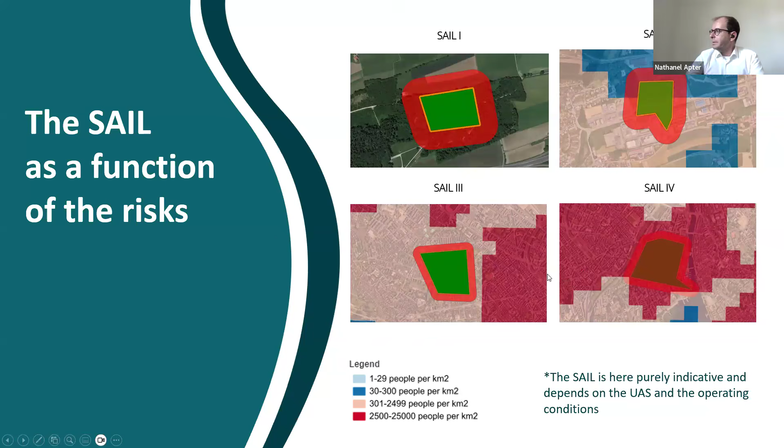Yeah, exactly. Then we have another definition which is important to understand for the next steps. It's the concept of robustness level. Maybe some of you might have heard that before. This term is very often a bit complex to understand. It's often described by two values, what we call the level of integrity and the level of assurance. The level of integrity is how good an objective is at reducing the risk.

And the level of assurance is the degree of certainty that we will have to show that this risk reduction is actually happening. So typically, the level of assurance can be a declaration, but it can also be a design verification. It depends a little bit how high the SAIL will be and how high the risk will be in general. Usually, this robustness level is either low, medium, or high. And we will see that this level is thoroughly documented in certain annexes of the SORA.

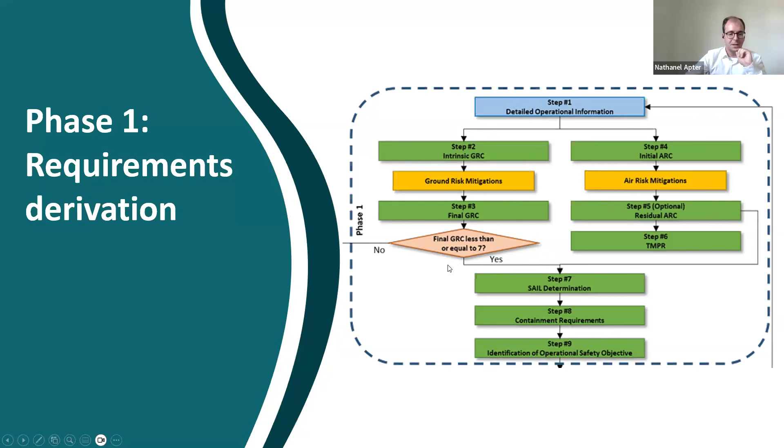The next step would be to look at a concrete use case because it's all very abstract, and I hope I didn't lose everyone already on those concepts. I think the best is to really look at a concrete use case to understand how this applies in practice. Before that, it's important to say that SORA 2.5 is not yet applied in the European Union, and therefore the example we will study was similarly authorized on SORA 2.0, but not yet on SORA 2.5. It's a fictional operation, but very similar to an operation which has been authorized in Switzerland.

We note also that the SORA process, and that may seem a little overwhelming for some of you, is a longer process to show the airworthiness of an operation. But it's not because we look at this specific use case that it's only valid for a specific place. In general, a SORA can be valid for a set of missions for an entire country, for the entire United Kingdom, or for the entire Switzerland. It is by no means specific to a location. We will study a location today in order to have something more visual, but the idea is not to have something specific to a location.

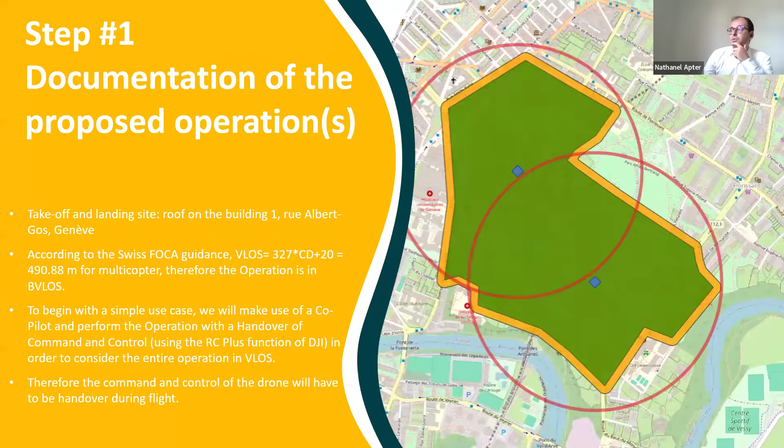Handover is usually a trick that we can use to extend the visual line of sight distance without going into a beyond visual line of sight use case. So that's about the visual line of sight distance. Then something that we also need to do in the first step is to study the area a little bit more, and especially the safety distances. Those safety distances are important for our ground risk class evaluation.

So in general, here again, I don't know the level of knowledge in the audience, but we usually introduce safety margins around the area where we intend to fly. The area where we intend to fly, which we see in green, is commonly called the flight geography. Around this flight geography, we define what we call a contingency volume, which we see here in yellow.

This contingency volume is here for all abnormal cases, meaning problems with command and control, problems with navigation accuracy, problems that could occur during normal operation. Here again, the Swiss FOCA provides guidance on how to calculate it based on different things, among others the accuracy of the navigation, the position hold error, the reaction time of the pilot, and the distance for the contingency maneuver. In our case, it would be about 30 meters. So it's important to calculate this distance, which we see here, like I said, in yellow or orange.

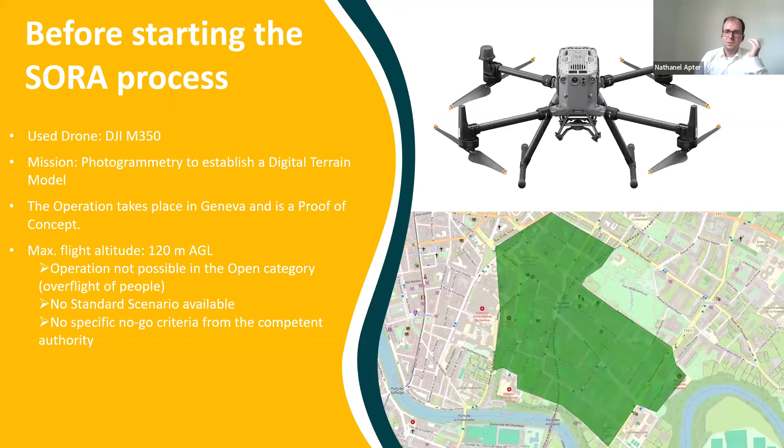Then we have as well the ground risk buffer. This is this huge area on the ground in red, which is usually calculated as equivalent to the maximum operating altitude. So the maximum operating altitude, if you recall, was 120 meters, right? And we add as well a margin vertically to this maximum operating altitude, which is around 30 meters, again, of contingency volume, because this also exists vertically. So basically, the ground risk buffer in our case would be 150 meters in total, which corresponds to the maximum operating altitude.

Those three areas together are called the iGRC footprint, the intrinsic ground risk class footprint, because that's the place where we are going to determine our ground risk. Exactly. So based on that, we go to the second step. So the second step is basically based on this area, we can now look what kind of population density we have in this iGRC footprint, and determine the maximum population density.

We can also, based on the characteristics of the drone, determine the maximum speed of the drone and the maximum dimensions of the drone. And we will get a ground risk score, which is here 7. So that's due to the fact that we have a quite high population density, 6,331 people. But also the drone is classed in the second column of this table because it exceeds 1 meter. The velocities could be in the first column, but the size of the drone is clearly in the second. So we see we have a ground risk class of 7. This is already quite high.

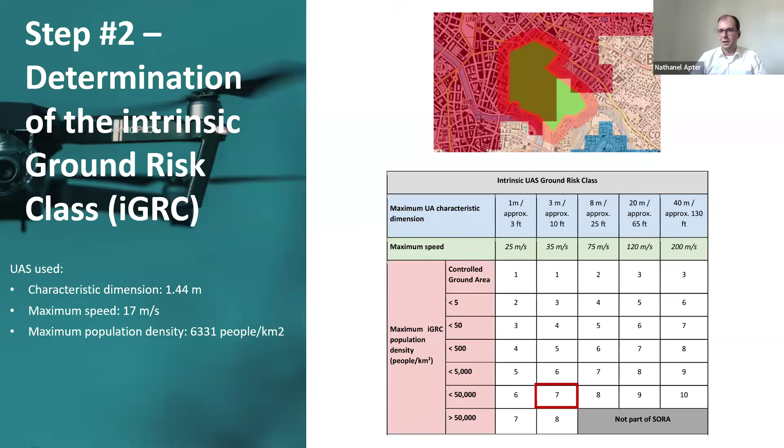So we will find this out later on in the SORA. Usually, in step 7, we determine the SAIL based on this ground risk class. Here I'm fast forwarding a little bit so that we can really also understand what that means in practice. But in step 7, we have this table that allows us to determine the SAIL based on the ground risk class. And we see that with a ground risk class 7, we have a SAIL 6. So that's very high requirements for the operation.

So we need to think about strategies to reduce this SAIL to a lower SAIL. Ideally, a SAIL 2, maximum a SAIL 3. These are SAILs that we will be able to fulfill, but SAIL 6 is not realistic in our context. And here we can make use of different ways to do that. The first thing to look at is to make use of the flexibility given in this step 2 to maybe change line or change column, meaning having a lower population density or having a smaller classified drone or a smaller velocity drone.

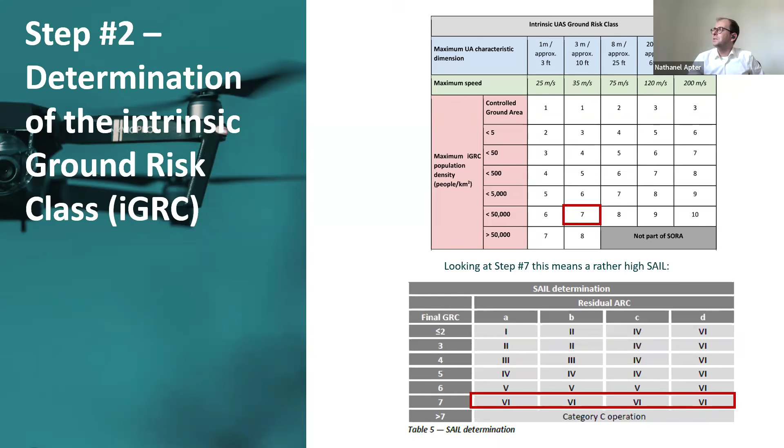And the SORA gives us this flexibility. So we have in one of the annexes of the SORA some quantitative methods that allow us, under certain circumstances, to actually reduce the column which is used. So if we have a maximum velocity which is reduced by 25%, then we can increase the maximum size by 70%. And that would allow us to have the Matrice 350 classed in this first column of this table, because we have a speed which is 25% lower than 25 meters per second, but we have a size which is 70%, or 40% actually, larger than 1 meter.

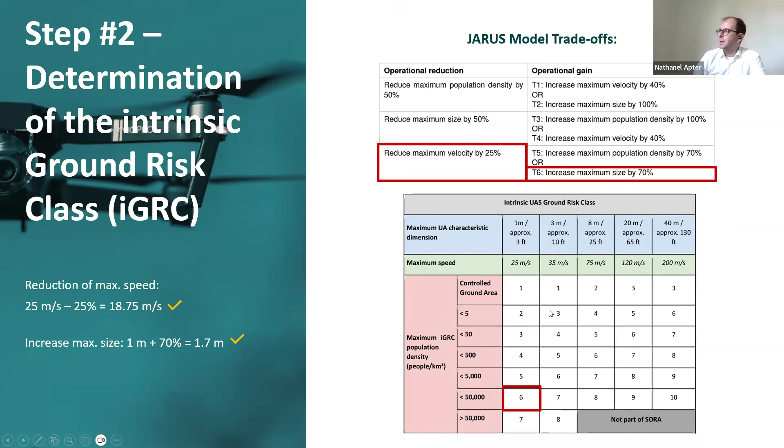There would be other ways, so the other trade-offs could apply as well. We are far away from the maximum population density of 50,000 people, so we could have used as well the first trade-off. Exactly. So this way we are able to reduce already the ground risk class to a ground risk class 6. And that means in practice that we will be with a maximum SAIL of 5, which is still far too high. So then we need to think about more strategies to reduce the ground risk. And that would lead us to step 3.

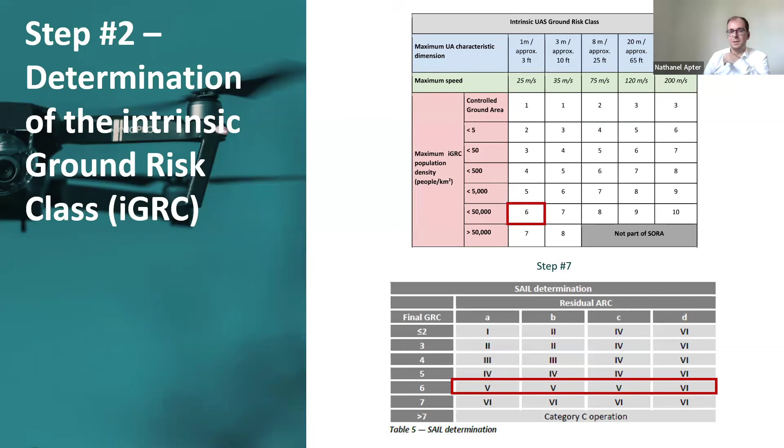So in step 3, we have the possibility to reduce the ground risk using what we call mitigations. So basically there are 4 types of mitigations with this new SORA, and I think that's one of the largest differences with SORA 2.0. So we have sheltering, meaning that we usually consider that people spend most of their time inside, and this is a valid assumption, I would say, for residential areas at least. For other places it can also be argued. We can use this mitigation in this context, so we can get a -1 point reduction out of that.

Then we have the M1B mitigation, which is about operational restrictions. This would typically apply if we fly at night, or if we fly in certain contexts where the population density on the ground is lower than what we evaluated in the beginning. Here, it's not really applicable for our context, so we will not make use of it. Then we have the mitigation M1C. That's about being able to observe the people on the ground and to reduce the risk by maybe changing flight path during flight or adapting our flight path to the population on the ground.

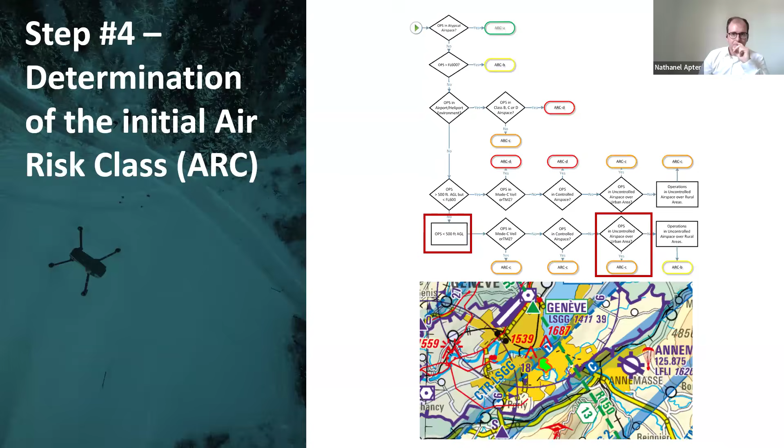And here we are in urban area. We are in uncontrolled airspace below a certain altitude. So we have an air risk class C. Here again, we have the possibility to reduce the air risk class. Usually there are a lot of arguments to reduce the air risk class. Here, for instance, we can use the fact that we are in visual line of sight again to say that we see incoming traffic, and that would be an applicable strategic mitigation, so reduction of the risk in the airspace.

Another one would be to consider the rules applicable for manned aircraft. Typically, manned aviation has a minimum flight altitude of 300 meters in urban area. So usually below 300 meters, there is not supposed to be much traffic, I would say. And that could be also considered a kind of mitigation. Based on that, we can reduce our air risk class to air risk class B instead of air risk class C.

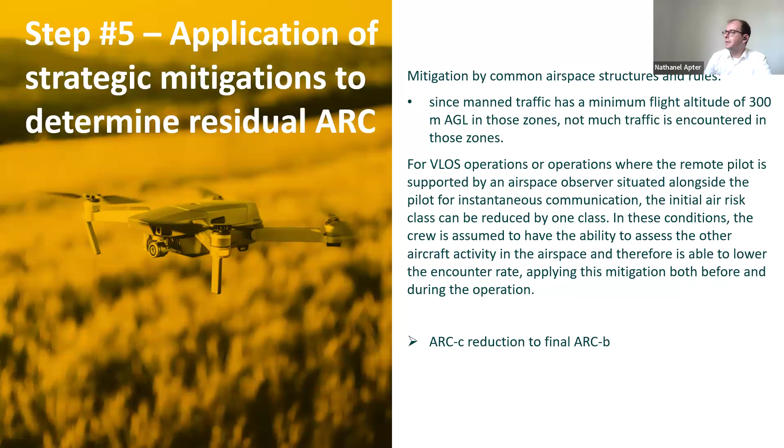Also step 6, which is often forgotten and which is especially important for beyond visual line of sight use cases. Step 6 basically tackles the residual collision risk. That's what I mentioned before. One needs to be able to demonstrate that one can also go out of the way whenever a manned aircraft is actually incoming and closing to our operation. So it's about having procedures on what to do in case of an incoming manned aircraft.

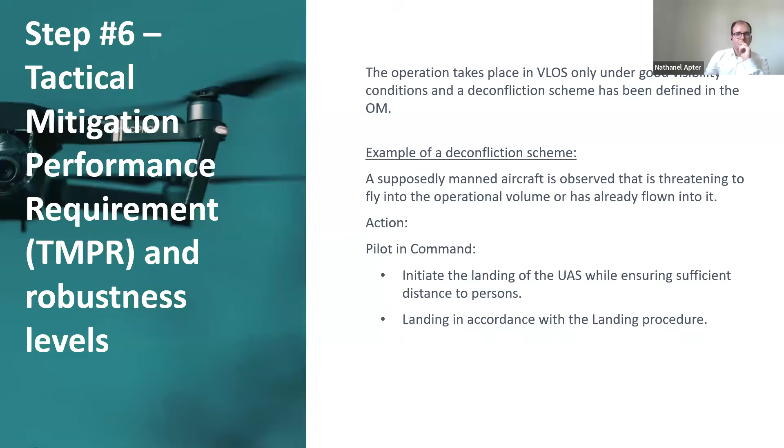Then we go to step 7. So I mentioned it already before. This is the SAIL determination step. So in the SAIL determination step, we will have ground risk 3 and air risk B. And this leads to a SAIL 2.

And here maybe some people might wonder as well, well, we did everything to actually have a SAIL 2, right? We could have had a SAIL 3 or a SAIL 4, since we could also have chosen not to use a mitigation or another. And I would say that depends very strongly also on the drone you are using, since some drones do comply with SAIL 3 and some others do not. Currently, at least, there are not that many drones that have a design verification for SAIL 3 or that have been approved for SAIL 3 operations, but there are a few.

It's not the case of the Matrice 350. So because of the fact that it's not yet compliant with SAIL 3 norms, our best guess is probably to go with SAIL 2 and to do everything possible to actually stick to a SAIL 2 use case. Maybe in the future, DJI will do the SAIL 3 compliance activities and show that they are SAIL 3 compliant. But in SAIL 1 and 2, there are not many technical norms and technical standards needed, while in SAIL 3, 4, 5, and 6, it's typically the case.

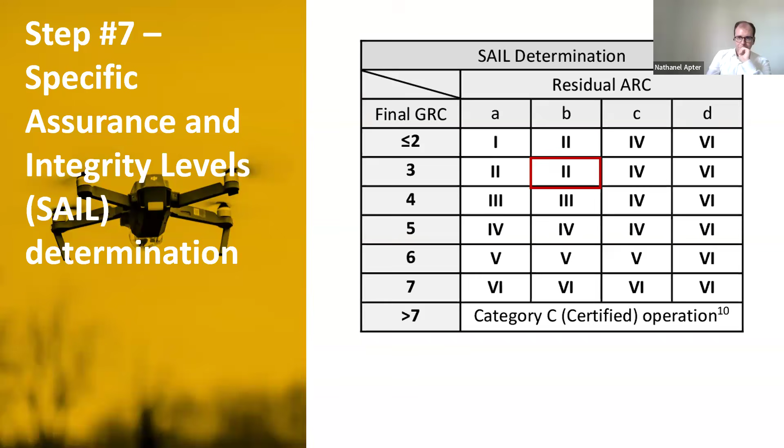Following that, we have step 8. So step 8 is a bit the completely new thing for most people when it comes to the SORA. It was not something present previously. So basically, and that's quite important, and I will make it short from here because I see also that time is running. So step 8 basically is about determining the containment requirements, this risk of flyaway that I mentioned in the beginning. So for that aim, we usually calculate 3 minutes of flyaway at full speed. And here we get 3 kilometers.

And what the SORA says is basically if we have a value below 5 kilometers, we should use 5 kilometers as adjacent areas. And then we do a kind of averaging of the population density in those areas, which gives us here 4,646 people per square kilometer. And based on this average and the SAIL we had, we can establish the so-called containment requirements, which are here low. This again will drive some requirements in the SORA that we will need to fulfill with regard to flyaways.

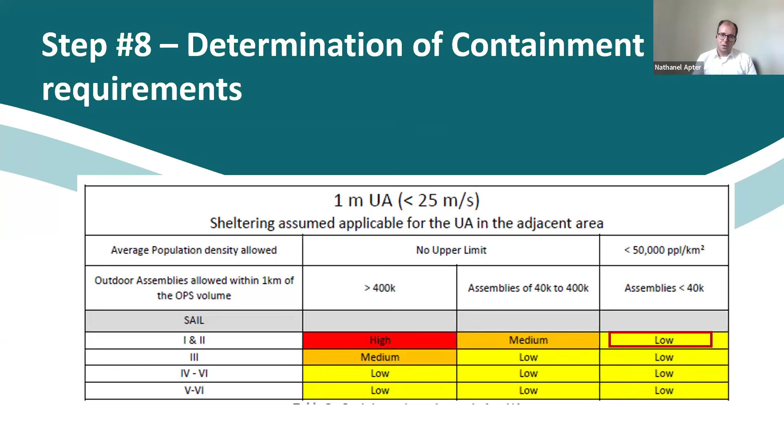Those requirements are usually identified in step 9. So here we see again a bit of an awful table. So with these low, medium, and high levels that I mentioned before, and depending on the SAIL, a low, medium, or high level for those objectives established in the SORA. We can have a look shortly at what that means in practice for one of those operational safety objectives, which are at the end of the SORA in the compliance phase. So that's already phase 2, where we actually comply with the requirements.

And we see that, for instance, OSO 3, so operational safety objective 3, is about maintenance. It's about having instructions for the maintenance of the drone, which cover the designer instructions. It's about having maintenance staff which is competent. It's about having maintenance instructions which are documented, having a log system available to log maintenance, having also a system to record the qualification and the experience of the maintenance staff. And here again, we use this kind of compliance matrix to actually show the compliance to those requirements.

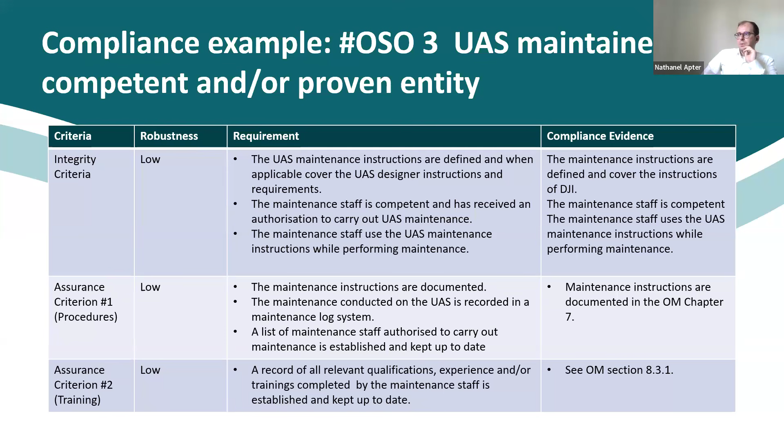All right, I think we would be through. So I would be glad to take a few questions as well, if there are any. So before we dive into the questions with Elena, Nathanel, well done, because you walked us through a use case where we started at a ground risk of 6, ARC-C, and you managed to transform it into a SAIL 2, so well done. Now, having said that, Elena, why don't you walk us through some of the questions that have been asked within the Q&A function?

Certainly. So let's start with the first one, which is: SORA 2.5 includes Annex E, dedicated to cyber risks. Should the cyber risk reduction measures be addressed as part of final GRC or residual ARC or other operational risk analysis? Do you have examples of efficient and acceptable cyber risk alleviation measures?

Yeah, that's an excellent question. So basically for now, the cyber requirements were not taken over in the acceptable means of compliance in Europe. I don't know how that will be in the UK, but it's still pending. And I think it's not so clear in which way they are going to be taken over. There is a cyber annex.

However, the cyber compliance is mostly at these objectives level. So depending on which objective we are talking about, there might be certain requirements that are related to cybersecurity. For instance, if we talked about maintenance, maybe maintenance should be also, or I would say, bulletproof to cyber attacks. For instance, firmware updates or other updates which relate to maintenance should be also protected against cyber attacks.

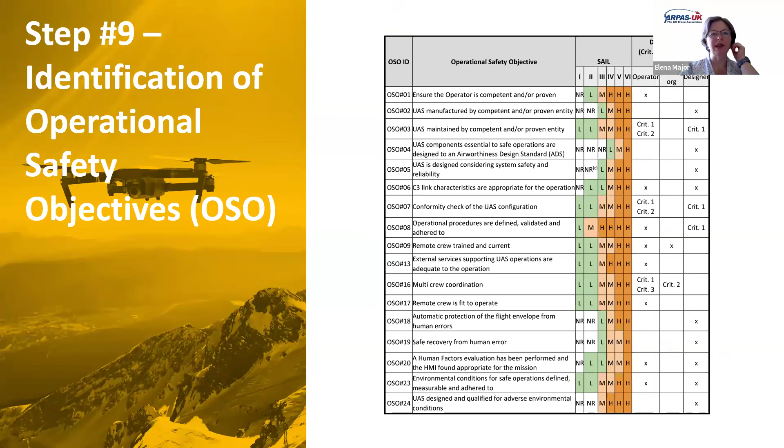On BVLOS, what are your experiences with introducing ground observation tactical mitigations and them being accepted? Yeah, so it's a good question. With BVLOS, a lot of challenges started, and that's why we didn't go through a BVLOS use case today, because it would have taken us the entire day probably. So it becomes more difficult, but everything is possible here again.

This mitigation M1C becomes more difficult to implement because it's about ground observation. It's about seeing people on the ground. And if you're in BVLOS, you don't see people on the ground. So there is a lot of discussion whether we could use technical systems to do that instead of people and use M1C. It's still very much experimental. And I would say for now, at least, the SORA constrains the BVLOS use case mostly outside of cities and mostly outside of urban environments, unless one goes through SAIL 3, SAIL 4 projects, and then the situation is slightly different.

What if it is not possible to visualize entirely, full-time, the overflown area? Can M1C still be assumed equal to -1? Yeah, that's an excellent question. So it's funny because we had this discussion with the Swiss FOCA, because like I said, this example was actually approved in Switzerland. And the applicant was a bit dubitative on the possibility to actually keep also the area which is in red in visual line of sight, because that's really a lot of area to keep in visual line of sight. And especially, is it really possible to see the people on the ground that far away? Even closer, 490 meters visual line of sight distance is actually quite a bit to also be able to see the people on the ground.

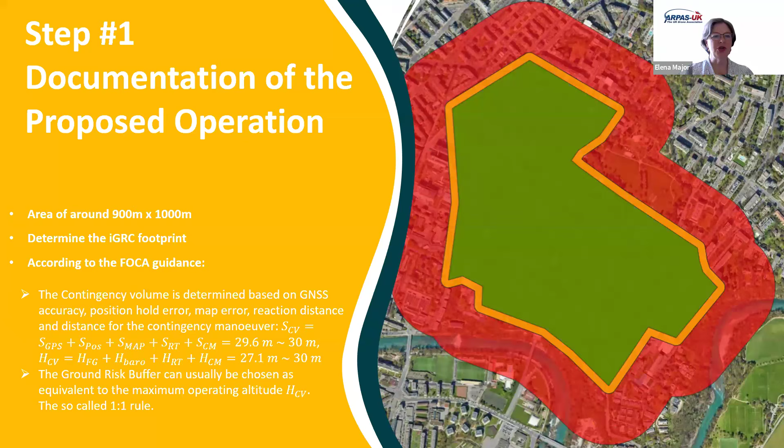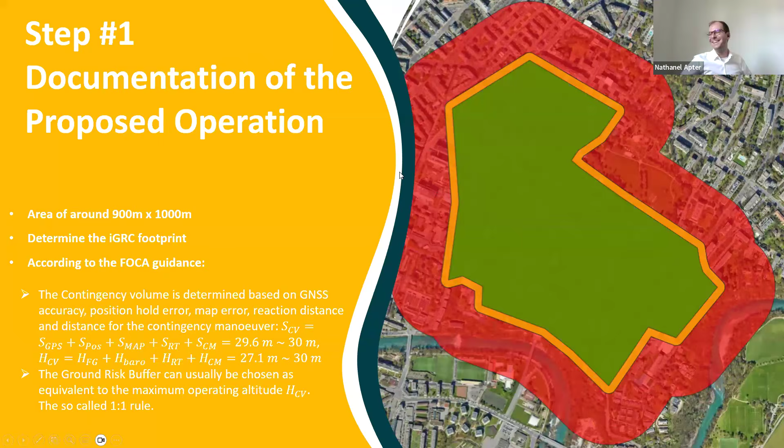Which app has been used for the calculation of the population density in the 5 kilometers around the operation? I knew this question would come. So I have to admit it's someone in my team that had a look at this tool, and for now we are still experimenting a little bit within UASolutions to find out. But I believe, if I'm not wrong, it's mappen.fr. It's a French tool, and it seems that it's possible using this French tool to actually get an averaging of the population density in a larger area like that.

I don't take any responsibility for this tool. Like I said, it was more of a trial, and I'm not sure it works as intended. It's also something that we did quite quickly for this assessment, and that we would need to review or peer review first before we use it as an official tool. I'm also not sure that EASA or CAA UK would accept that. So yeah. Indeed, it's going to be one that's fairly key to all of this. What changes can we expect from SORA 2 to SORA 2.5?

Yeah, so the main changes are this step 8, because the previous containment was very difficult to grasp for most people. It was poorly written, and it was not clear which size of adjacent areas we had to take into account. Also, enhanced containment, which corresponds a bit to medium or high containment now, was triggered very easily and in a lot of instances, which blocked many operations since it was something quite new. No one was really familiar with it, and there was no means of compliance initially to comply with that.

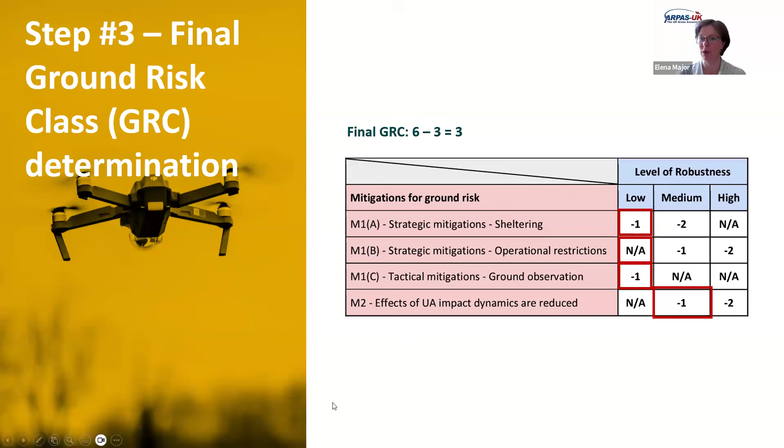So the final question is, for maritime operations over national or international seas, is boat/ship density considered as part of overflown population density? Yeah, so it's an excellent question. I didn't have that many cases of maritime operation, but the few we dealt with, it was a question whether there is ship traffic and how much. So actually, yes, it is considered as part of the overflown population density.

Then again, all those people in the ship could be sheltered, which could also be the case. Then sheltering would also apply to actually reduce the population density at risk. There is also the possibility to close an area to maritime traffic. This would typically result in a controlled ground area, or using M1B to have an operational restriction in time and space to reduce the people at risk. Exactly.